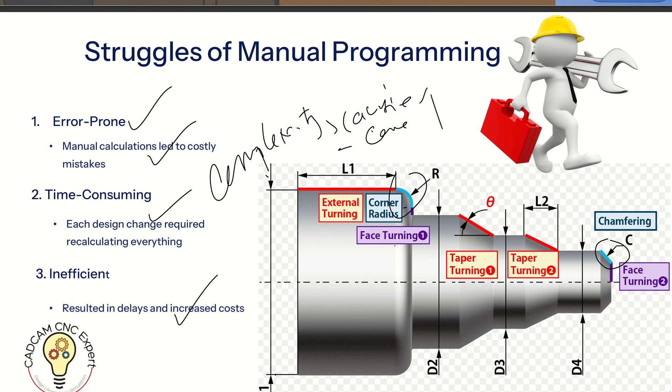There were also delays in terms of programming, since it was done manually. You're using a manuscript to write G codes down, then you transfer using a punch tape to the machine. So you look at these challenges, then you ask yourself, was it worth it? Now you are born in this era.

Maybe your generation was struggling with programming during those days, and now they have seen how technology has changed. And in today's era, how will they cope with technology? If you look at the past, and we look at how the transition has come into play, and we look at the present, you can ask many questions.

In the past, when you're programming, most of the workshops were heavy loaded. Machines were so huge. People would sit down at a table, calculating those parameters, putting it on the punch tape, then they set the workpiece so it can be cut. But technology came into play.

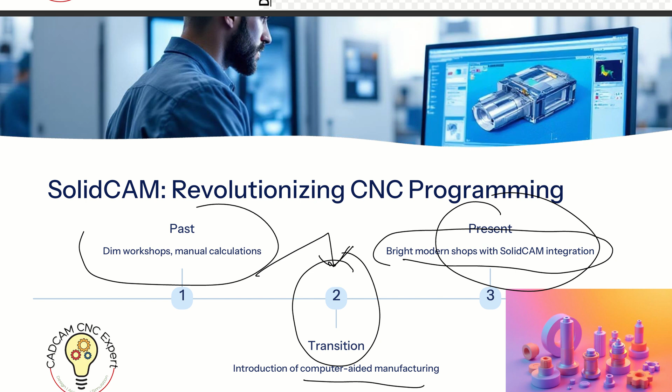Using computers, we have computer-aided manufacturing software, what you call CAM, that has come into play. And in the modern world now, in workshops, we have SolidCAM. We want to go to SolidCAM. We want to see how this SolidCAM will help us understand the time factor of programming parts for CNC turning.

We want to look at how SolidCAM works vis-a-vis the manual way of programming, because SolidCAM is now the current technology used in industries for industrial design and production purposes, to help you create 3D models and at the same time program, generate toolpaths, do a simulation, then generate G code.

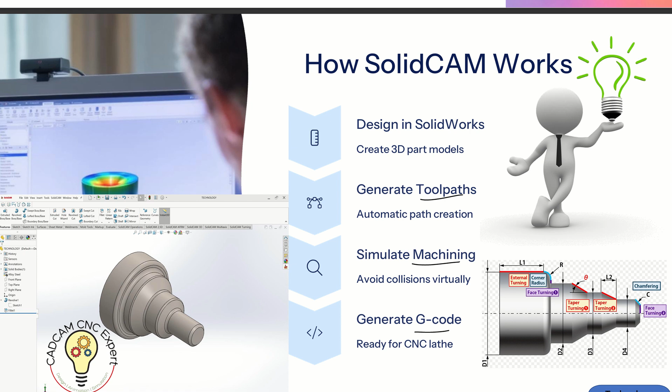So the main objective here is to compare the traditional way of programming and today's way of programming using technology. And we are going to look at SolidCAM. We want to design in SolidWorks. Then we create toolpaths. After creating toolpaths, we do a simulation. From the simulation, we generate a G code. Then we see how efficient it is, how time-saving it is.

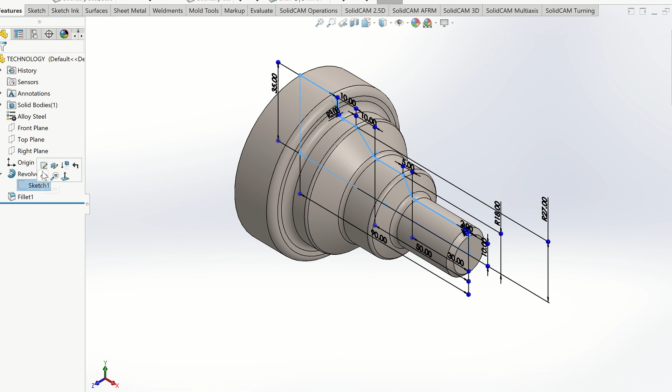I've already done my part. Maybe I'll show you the sketch. This is a simple sketch I want to machine. These are some of the parts. The diameter I was showing you is illustrated here. These are the radius ones. If you multiply by 2, you get the diameter, and these are the lengths.

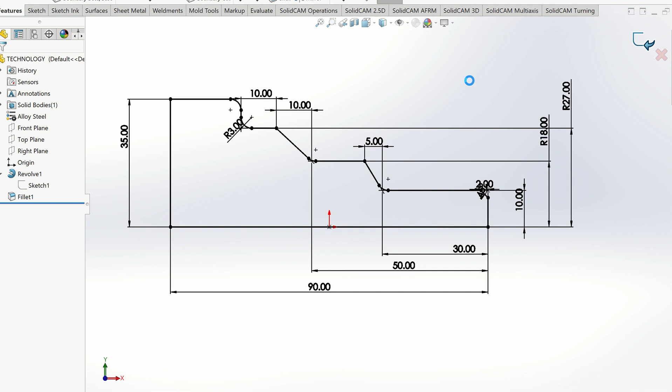I don't want to calculate, the software does it itself because I'm using technology. I don't want to calculate the radius or the chamfer or whatever. I want to use it the way it is because this software has done the simple work for me. So let's follow step by step how to create a part program using SolidCAM. My material is alloy steel and I have one part.

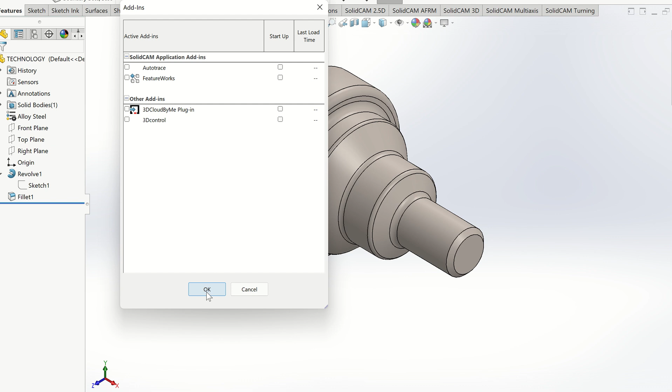I'm using SolidCAM 2021. You can use other versions, it will still work. So the first step is to ensure you have SolidCAM. If you're using SolidWorks with embedded SolidCAM or adding SolidCAM, you go to your options above here, then your add-ins, and you see all of the add-ins here. But I'm using the SolidCAM version that is integrated with CAD, which is an added advantage for me because it's only for computer-aided manufacturing.

So let's start one by one. You can go to SolidCAM here, and then create a new part, then turning. Then you click save. It opens up as simple as that. Then let's go hand in hand to see how this will work in SolidCAM, how SolidCAM eliminates the need for manual part programming. This is the simplest way SolidCAM works.

You start from SolidCAM operations, click new, turning, then click here. You can use external part saving or you can save the project as internal. Then you click OK. You select your machine here. I'm using Okuma. If yours is DMU, you can use DMU. Depending on your machine, pick the one that suits the type of controller or machine you have for programming.

I'm using Okuma. Then click on coordinate system. The first thing is to set up. In the old days they also did setup, but how do we set? You need to set the part origin where the tool will start cutting. You click on coordinate system, that is the part origin, where you use G54 to G59 on ISO part programming machines. Then click on center of the revolution face, pick any face, and it will put the coordinate system here.

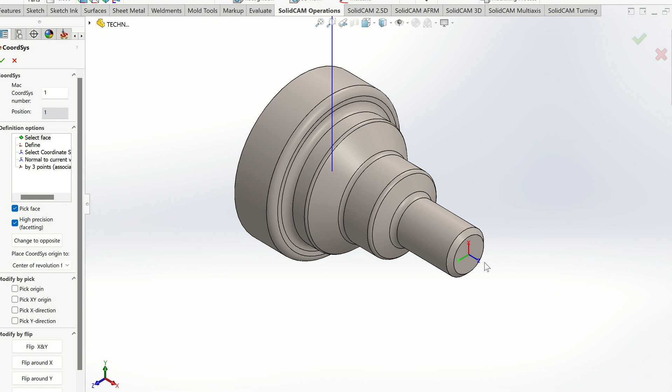The Z, which is blue, should be pointing away. Then the X should be pointing up or down depending on the tool approach and your tool orientation on your machine. Mine is moving up and down. So I'm along the X-axis for facing and along the Z-axis for turning, using face turning or cylindrical turning. Once you finish, just click OK here. Then next, just click OK.

We want to look at how this one works. Because I'm only using one part origin, I don't need to put another one. I can just click OK.

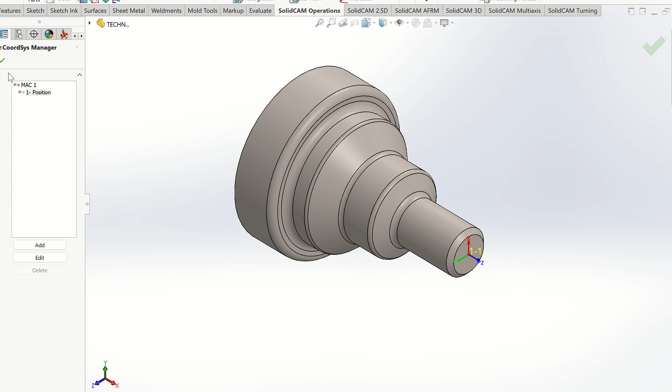You leave it to do what you call parsing. It scans the part, the model, and then it generates a profile or a rectangle profile along the Z-axis or along the Z path. Then the target, it has already picked the target. Maybe I can expand it more. The coordinate system is where the part origin is.

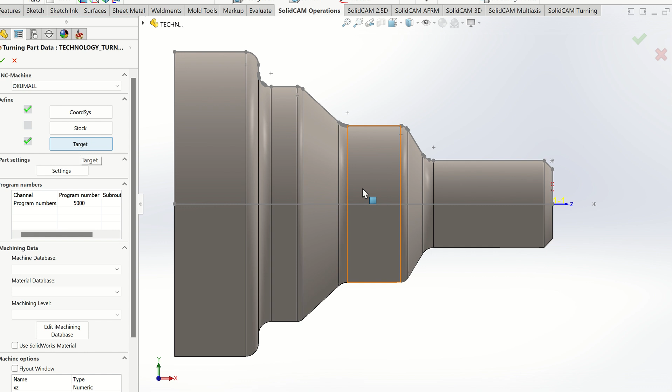The stock is the material that is not cut. Then the target is the material that is cut. So the material that is not cut should be more above this region. The target is this part. So the material which is not cut should be above this region here. So let's go to stock. We want to define our stock.

The simplest way to do this in SolidCAM: you can use absolute coordinates here. Then you can say take the stock dimension. It calculates the stock dimension, so you're able to know that here, that is the Z positive. I want to do facing, so I can put 2 mm for facing. You see now the stock, the green color is the stock material.

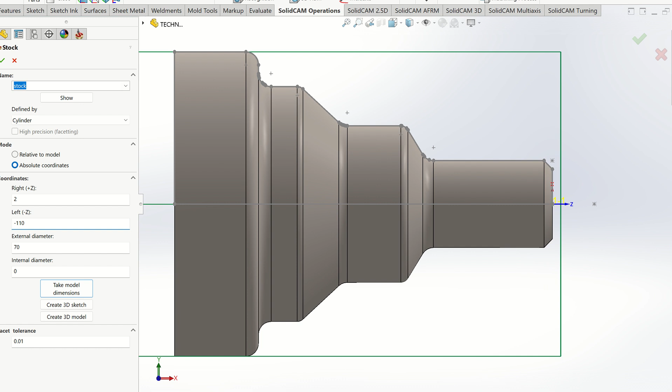It increases, the material which has not been cut. Then Z, for holding purposes, you can add 20; I have minus 110 or 100, it's still okay for this. If you're using a material which is hollow, you can put the internal diameter here, but mine, the stock will be solid, so I did not put internal dimensions here.

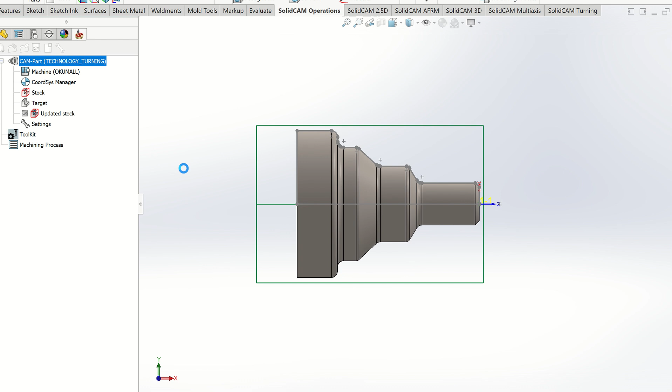Then the diameter here, because I cannot cut this part well unless the material for the external diameter is more. So if the workpiece is 70, then it should be maybe 75. You can have a 75 stock. Then I click OK. So this way I've created my stock. The green color has now changed to black. The black region is half of our stock, which is half of the material.

Then here, because I only have one part, the target is all selected, so I did not pick again. Click OK, then I proceed. The next step in SolidCAM is you need to create your holding place, the jaws. Where are you holding the jaws? So you come here to setup, right click on setup, then you say edit. We want to position our stock. Then under edit, click on this one, table clamping.

You see it generates this color. Is it purple? It generates a purple color. These are the jaws. Where are you going to hold it? I'm going to hold the other side, because the jaws are inside. I want to position it far away. Then I click on the tool positioning, then I click here, pick Z, then I pick a place somewhere here. Then I click OK. I can say now minus maybe 105.

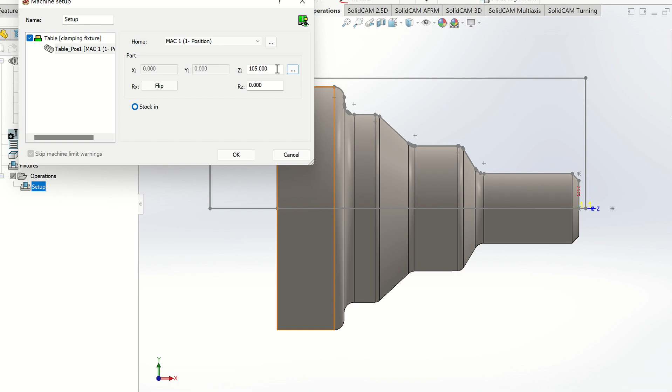Then I click OK. The value here will become positive, but on the other side, if you pick, it will become negative. So you can put a negative value here. Now you see my jaws have moved from this point to this point, so that when a tool is approaching, it will not crash into the jaws. It will be away from the jaws. You can put a negative value, or you can click anywhere, then you position it. Here it becomes negative, but here it becomes positive. That's okay. Then you click OK.

Next, now we want to add our operations. Take time, we'll see how fast we program with this, and then compare with the traditional way of programming. Come here to operations, right click, because we have done our setup: part origin, the stock dimensions, where our chuck will be. The key operations here are very simple: facing, straight turning, fillet, chamfer, combine. So this is combination turning.

We go to turning operations here, then click face. On facing, click new. The geometry is where you want to cut. Where do I want to cut? So you click on new geometry, and then you can pick this line. It should move down. If you look at it, it should move down, and then you click OK. This line, the one I've picked, this whole line, should move down.

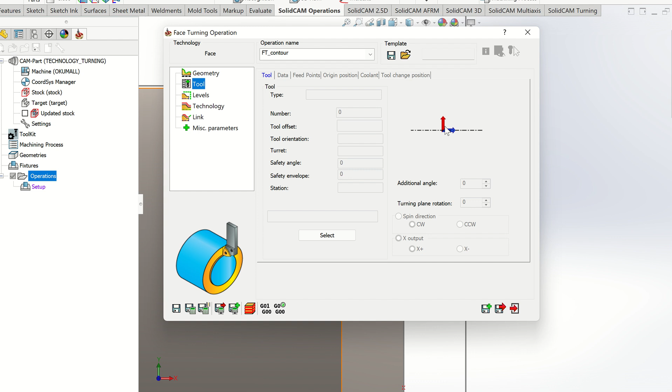So we go to tools, then click select. Here we want to add an external turning tool. Scroll down, come here, external turning tool, double click on it. It will open up, then you give the profile.

I'm using DNMG 1504. Use capital letters, DNMG 150408, and then press 0408. Then it updates itself here.

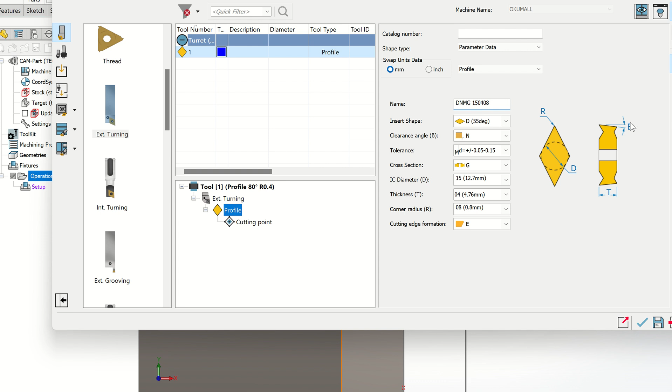So this is the tool I'm going to use, and then I click on this part to remove the positioning, so I allow it to position the tool here, so I can show it well and see the positioning of my tool. The tool has been well positioned.

Once I've done that, I go to cutting parameters. The holder is this here, cutting parameters. I can adjust my cutting parameters, 500. The finishing can say 600. This one can be 600 also.

You can use cutting parameters feed per minute or per revolution. This is G94, this is G95. This is G95, this is G94. If you use G94, you can put 100. If I use G95, you can use 0.1. So these are the cutting parameters.

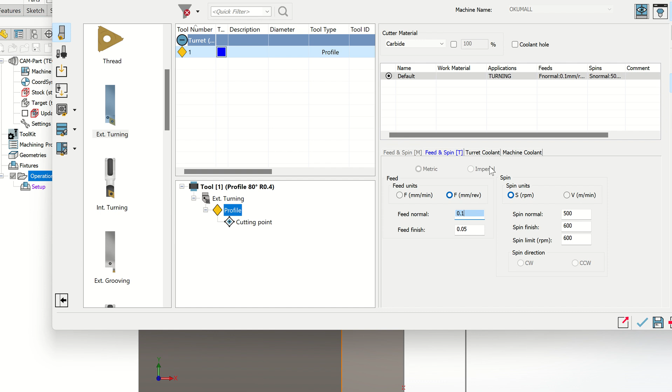When they were calculating, they need to put these parameters when they are cutting using manual programming. So once you do that, you can also change the holder, the cutting point. You can also pick the holder. You click on this tool to change the location.

You can click on this one to change the holder size. Maybe you're using a square straight tool. Here it is MD, so you put MD, MD, J. Then here the size was 15. Again, you put MD, J, and R, because my insert is DNMG.

So the holder will be MD, J, and R depending on what you have. Then the size is 20 by 20. I'm using 20 by 20 like this. Then the K, I'm using K15, so I can change here to K, meaning the length size of the holder. That is K.

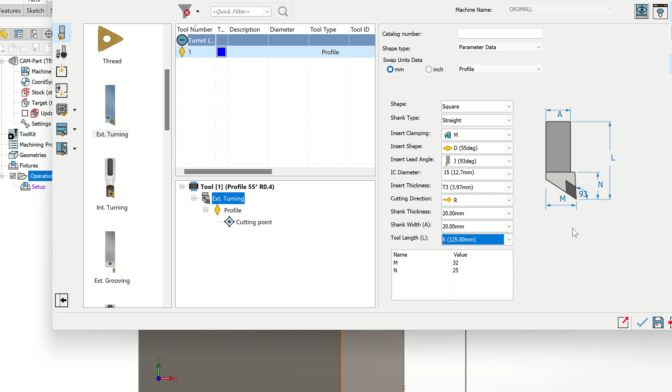Once I'm okay here, I click to accept the changes. Then I go to level, safety, I can put like 3 away. I go to technology. Here I can put equal, put stairs. Then you can choose to leave the material or not. Then go to links, click calculate.

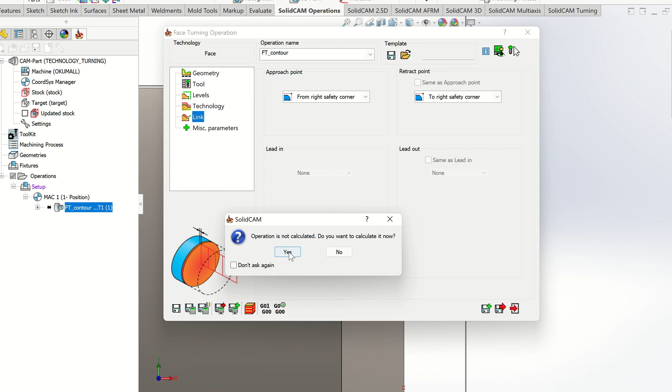Then let's go do a simulation. You click yes, do a simulation, yes. Then you click on turning. You can click on turning. Then you click simulate, so it shows us how it is cutting. That is what we call simulation.

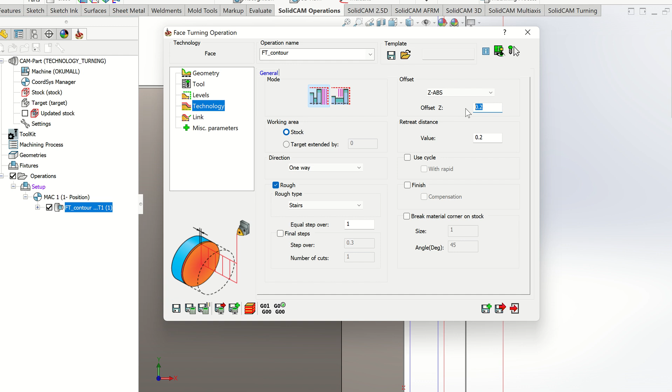So when you're using software, it's easy to cut. And remember, this material has left because I left those materials. How do you remove it? We can put here maybe 0, 0. Then we calculate again, then do another simulation, and see here how it cuts.

We can use turning, click on turning. Then you click here to play so that you can play. Then here it shows the cutting parameters when it's approaching. Now it has removed the material. You see it has removed.

This is what you call facing. You are now doing facing, just cutting on a flat surface, call it facing. Also in milling, you have what you call face milling, because you're cutting on a flat surface.

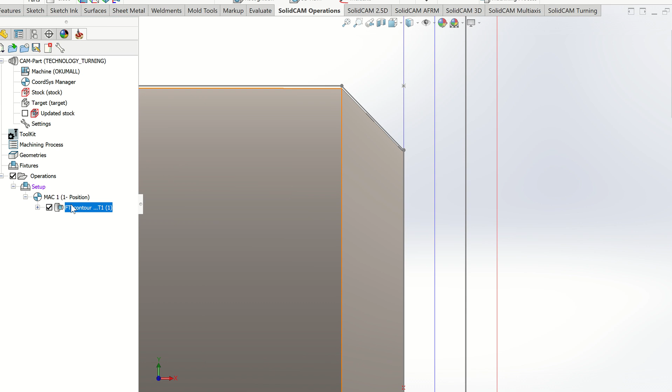So here you can also click exit after we finish, or right click here, and you have what you call — you can generate a G code, or use this SolidCAM simulation also. It has its own simulation, so you can do SolidCAM simulation. You click play, it will do the simulation, as simple as that.

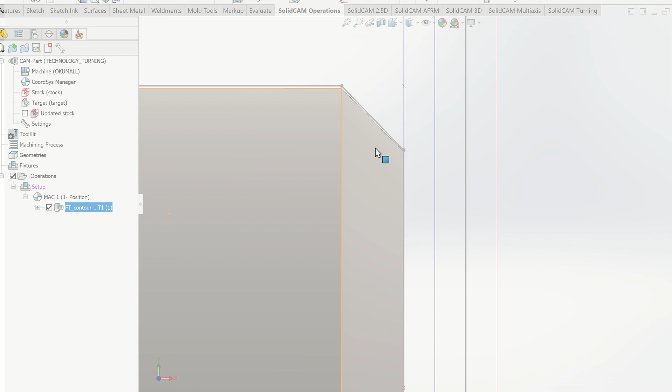So we want to go and add the last operation. Right click here, this one shows the toolpath. So these are the toolpaths now. How are they calculated? The software has done it, it has done computations — I'll show you why.

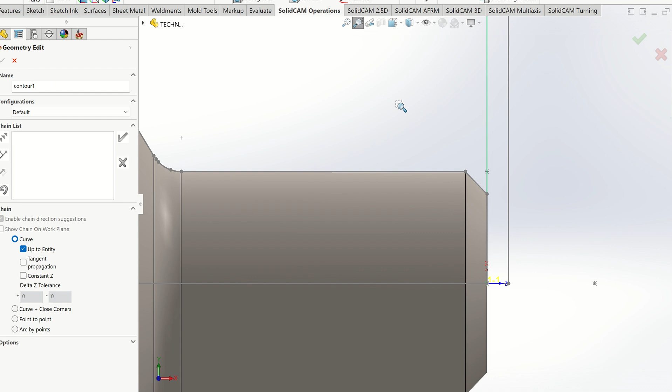Come here, operations, turning, then do turning. I want to use the same tool for rough turning and face turning. So click on this one, and then the profile, I can start from 0, zoom this region. Where am I starting from? I can start from maybe here, because that one I have finished. Then go pick the last one.

I can pick the last one here, like this. Let it calculate until the end, then once it finishes, click OK. Then tick here, yes, I'm using the same tool.

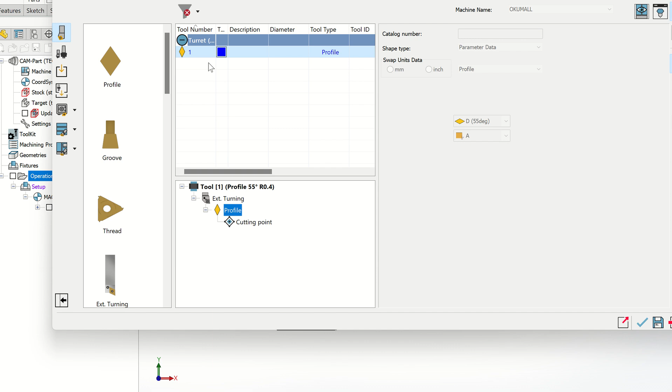Pick the same tool again. I'm using the same tool here, tool number 1, for doing turning and finishing. So I'll show you how to do semi-finish.

I want to use the same tool for finishing, so click here, ISO turning. Then ensure that you put here 0. Then click here compensate, to compensate.

So the tool will compensate itself automatically. I don't need to recalculate again, the tool will do it itself.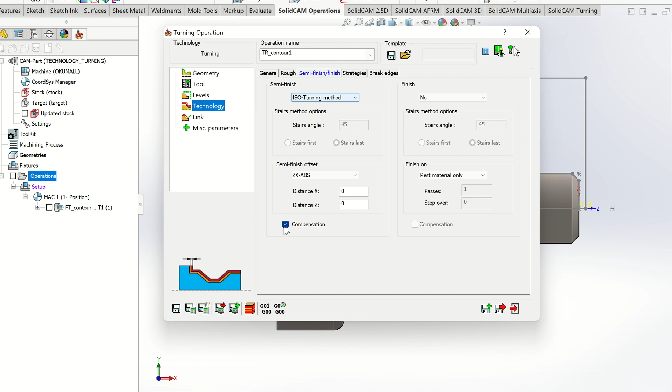Then strategy here, you can pick the descending motions or non-descending. I'm using descending motions. Break edges, you can leave the way it is. Then here you click calculate.

Once you finish, you see the tool paths have come here. These are what you call the tool paths. The blue one are the cutting one, the red one is the tool approach. The tool moves away when it's cutting.

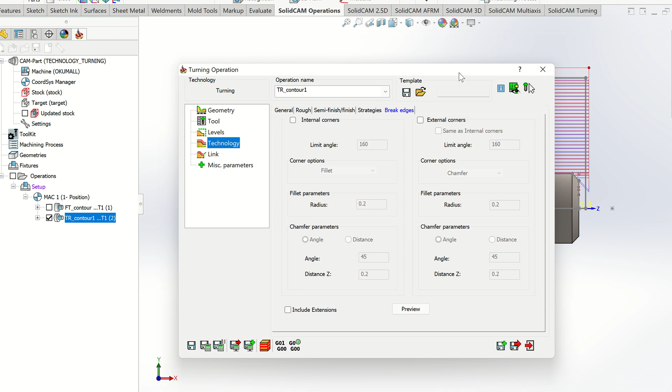Let me do a simulation, we see how it does. So click this one icon, do a click on, then say simulate.

Let's go to turning. You can minimize this, maybe if you want to see it well. You can minimize this one using your mouse, and position it at the center well, like this.

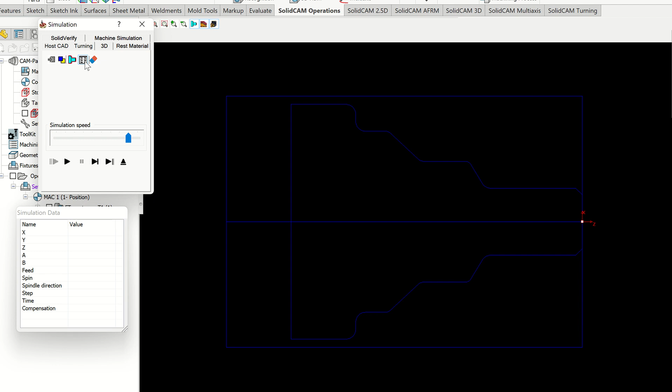Maybe to see it, you can increase the speed here. You can click on this to show the color, different colors, maybe this one the colors. Here the data when it's cutting, it shows you the data when it's cutting.

Then here you can say maybe show also the rest material. You can show the rest material, here it can display the colors. You can change the color that you want to display. Then here you can also stop on the next, in case.

So I want just now to click here, then show the data, then click here, we play, we do a simulation. Do you see here, the blue one here, it is my jaws, so the jaws are far away. So the tool will not knock in the material.

Then you see the blue lines, these are the cutting lines. They are now using what you call G01. I will generate the G code, I will show the G code, you see how it looks like. Then the red ones here are what you call the tool approach, the tool moves away from the workpiece.

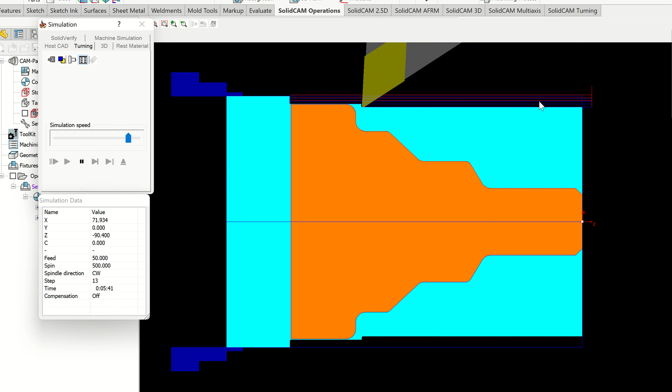This is the target, this is what I want to achieve. And then here, you see this color, it is leaving a material on the surface, which means it knows that material is compensated for finishing, left for finishing. So once it does rough turning, it will come again to do finishing on this material.

Yes, so let's finish this. We see how technology has changed or has shaped the industry of CNC programming.

It is almost finishing, almost finishing. I don't want to go fast, I just want to move the step so we achieve our target. Yes, we want to achieve our objective for this case.

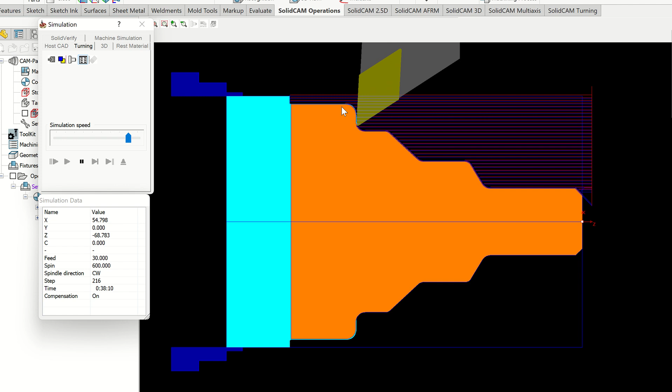And the work is perfect. It has finished, it has moved away. The red ones, as I said, is tool retraction. The blue ones here are the tool cutting or approach. So this is what you call the tool paths.

How were these people calculating tool paths during those old days? And how is software helping us to calculate tool paths in these generations? And how is it helping to automate the industry of CNC programming and CNC machining?

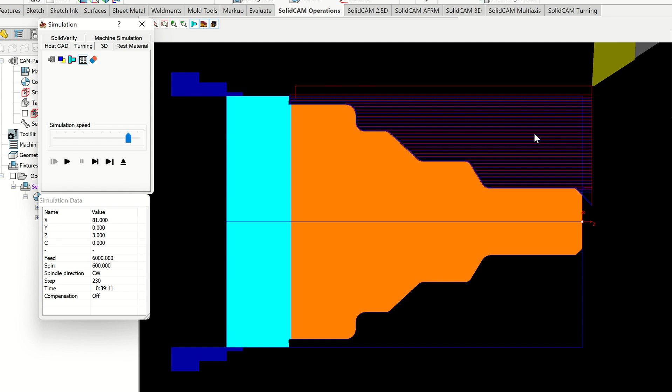Okay, we have finished, so let's go and generate a G code. We want to generate a G code. It is very fast, you click on this one. I want to combine, press control down, then select these two, then right click on it, then say G code generate.

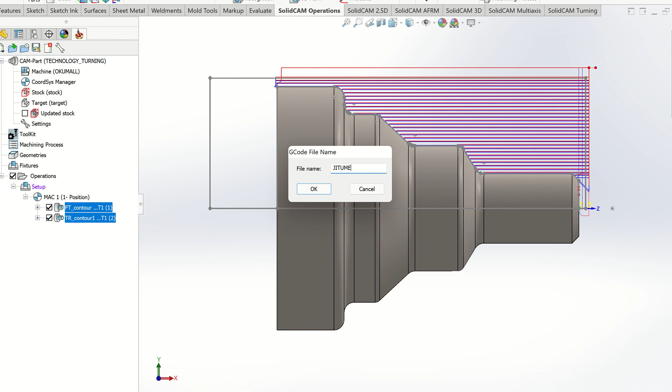Let's see the program, let's see the program, how it looks like. So this is what you call the G code. You see it has generated G code. Yes.

Let me zoom in a little bit.

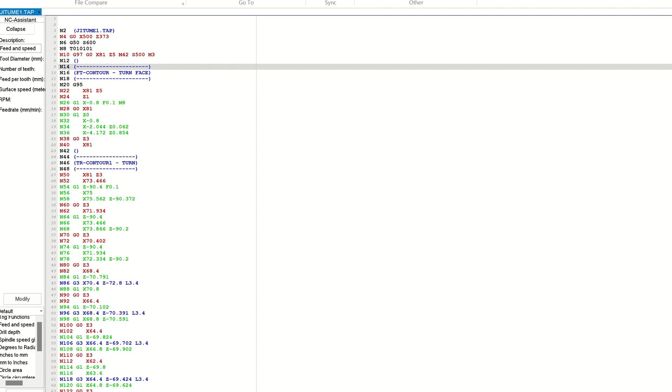This is what you call the G code. I wrote N2, so this is the name. When I'm editing, I can put a semicolon here, this one will jump. I can check my program.

This one I'm using the old system. I can use the old system and put, maybe my machine is just normally a Fanuc controller, so I can put 0101.

I don't want to put the activation of the gears, so I can leave this one. I can change this like this. This is how I want to see the time we are using to edit the program. Somehow the current one now depends on the controller.

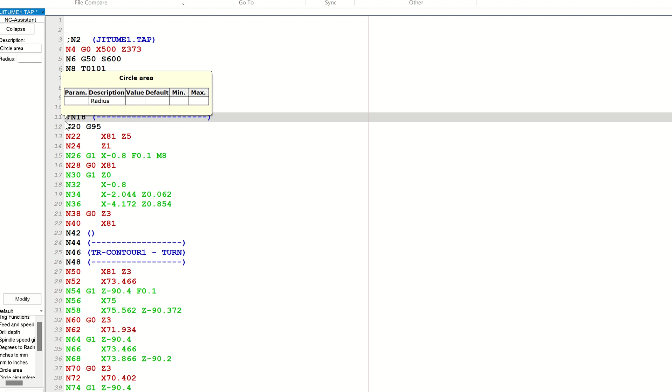If you're using Siemens, I will not edit the parameter because of the post process. But if I'm using other controllers, I need to check the current parameters before I take it to the machine. This one normally takes the least time, you don't need to take a lot of time editing this one.

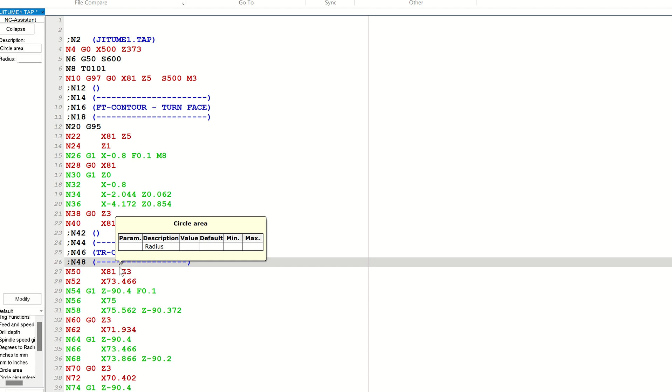Yes, so this is what you call the G code. I have programmed using SolidCAM, I have generated, I have done what you call simulation. I have generated the part, the G code itself. Then I'm able to check the program. So this is the program.

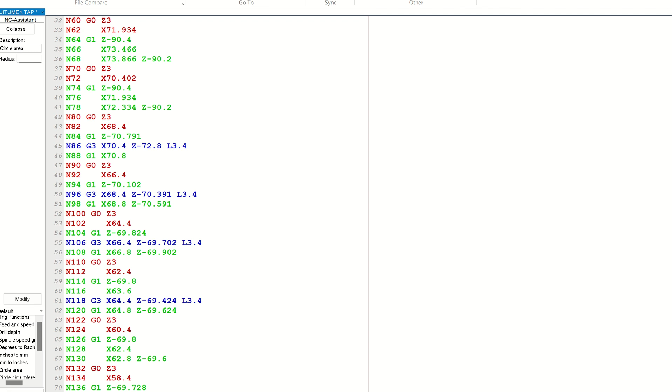The red lines are the approach. The green one and the blue one are the cutting. The green one is using G01 linear cutting. The blue one, which is G03, is using circular interpolation in the counterclockwise direction.

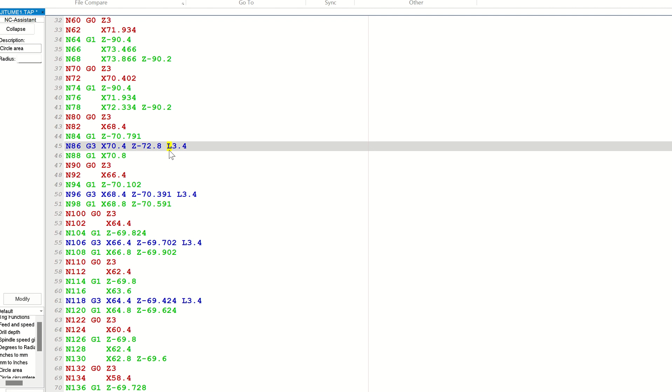This one I can also change. If I'm not using this, I'm able to change it very fast. I can come to edit this, say replace this, all of them. Replace, copy this, then say replace, then use R, then replace all, then say yes. This is very fast when you are editing it.

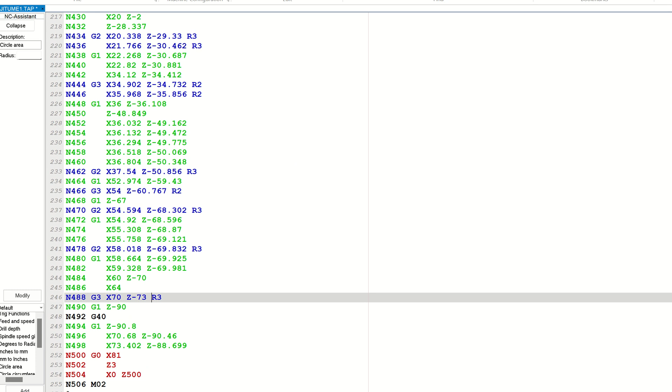I have replaced all of them so that when I put it on my machine, it will not stuck. I can also change this. In case I want, I can remove this or leave it the way it is. When I put a semicolon behind it, it will not cut.

Then here, if I put M30, the program will stop, will finish, then it runs back to the start. So this is what we call G and M code. G meaning preparatory function, and M meaning miscellaneous function.

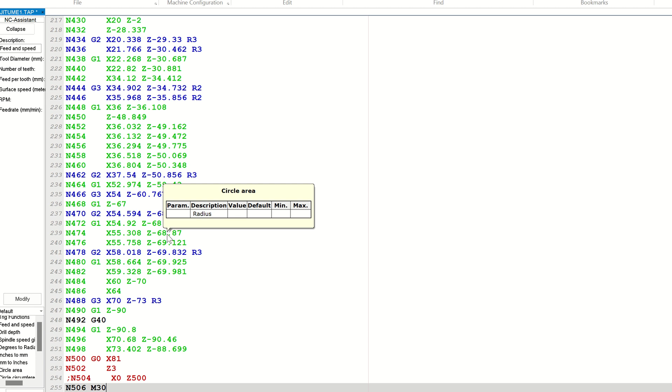So we have looked at how the software SolidCAM has changed or shaped the industry from the old manual way of programming to this current generation where we use SolidCAM to help us in programming. So welcome and be part of this exciting moment when we learn how we integrate our software to help us in programming.

So let's look at, if I might ask a simple question, what is the advantage of these softwares now? How do we compare the old ways of programming and the new ways of programming? Is there any advantage? Is there any step we may use? So this is key, this is key for our case.

So I want us to look at a simple advantage. Why SolidCAM? Why now SolidCAM? Is SolidCAM the technology we want? There are so many softwares we can use. I'm not marketing SolidCAM, this is just a question I was asking myself.

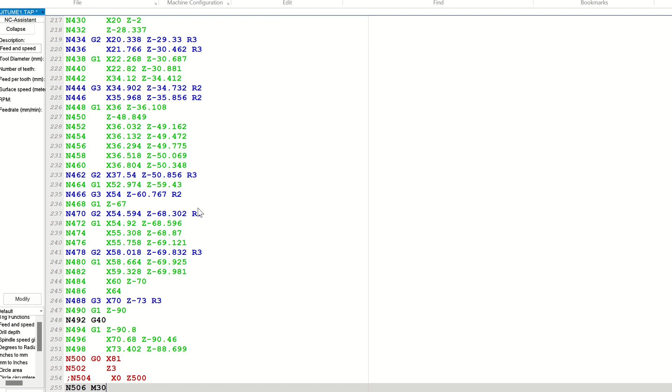How are these people programming, and how has it brought into reality the aspect of programming in this scenario, from the numerical way of programming until today? So if we go into our context, we want to understand how programming has shaped the world. So let's go and look at our programming.

Let's look at our programming. If we come to our presentations, what have we learned from SolidCAM?

One, when you compare manual programming, time was a factor, it was taking a lot of time. Second, it was prone to error. Then the work may take a lot of time. But we have used SolidCAM to do our programming.

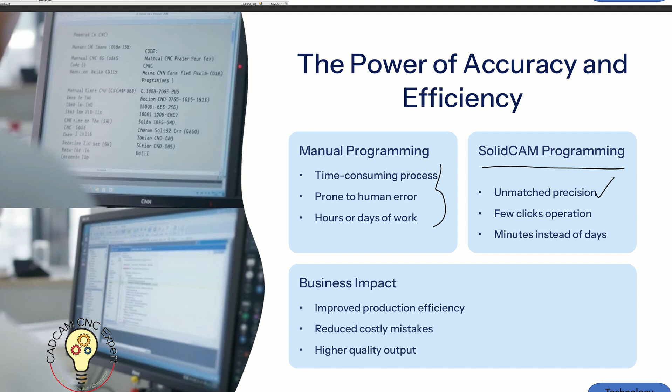One, the G code is fine because the software itself compensates the cutting parameters as I showed you. It is just a click operation, there are very few steps when you're using SolidCAM. Also, it has minimized the number of programming steps, because if you are programming a complex work it may take you days, but with this we have just taken minutes to program.

So in terms of business, we need to understand the advantage of technology, how it has evolved, and how it is improving production efficiency. So if you are in industry, you can opt to use CAM softwares to help you in programming. One of them is SolidCAM, we can also use MasterCAM.

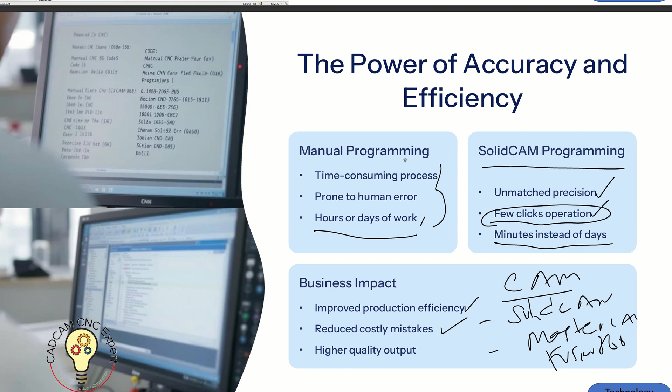You can also use Fusion 360. There are so many CAM softwares depending on what you're producing. If you're using CNC laser, CNC plasma, maybe CNC router, you need to check which software suits your work. It also reduces the mistakes that we make during manual programming, because when you make mistakes, it is at the expense of the company. At the end of the day, those errors have been minimized. The output is improved. The quality is improved.

In our real life scenarios, where do we apply this technology? In automotive, we are making gears, flanges, shafts. So we can use SolidCAM to program and automate our quality so that we can make complex shapes for our industry. Industry has changed. We now have high-tech vehicles. So if you have high-tech vehicles, you also need high-tech CAM softwares to help you in programming and in achieving quality.

Also in aerospace and aviation industries, you need to design high-tolerance components for aircraft. That's why we are using SolidCAM, MasterCAM, Fusion 360 to program and help in achieving high quality features for the aviation industry. Even in medical, making parts for implants and parts used in medical industries. So you need SolidCAM. This is the real world impact that it is achieving.

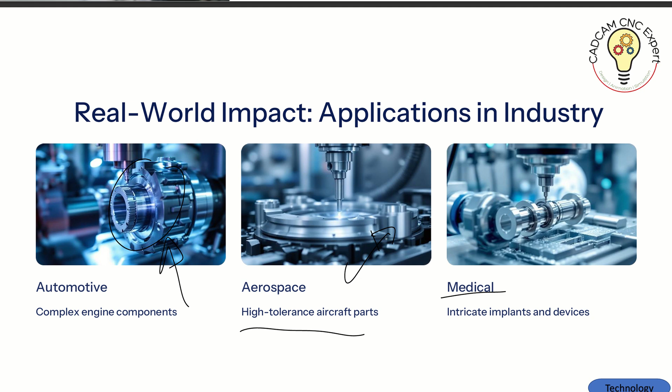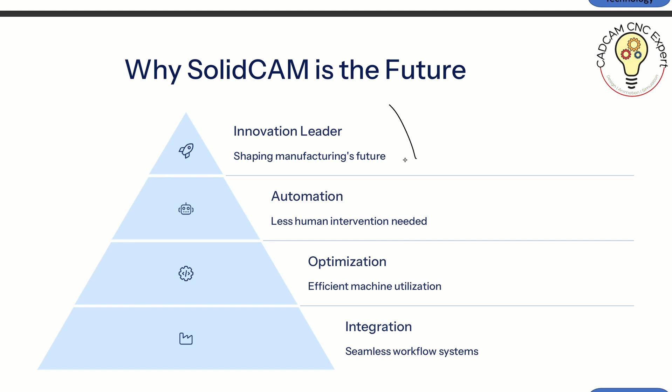When you look at World War I and World War II, there were challenges of quality, challenges of mismatch. Nowadays, mismatch has been reduced. Why SolidCAM? Is SolidCAM the future? I'm not marketing SolidCAM, but my topic is about how we learn from the evolution of manual programming to SolidCAM programming. SolidCAM is taking the industry. Why? Most mold makers and most industries are using SolidCAM to program.

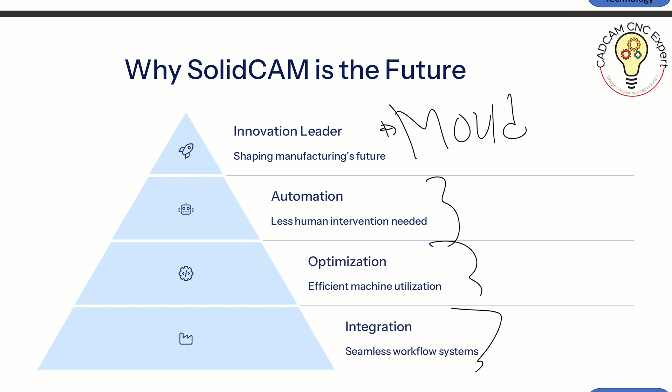It has also helped us to automate. You see what I've done? We have simply demonstrated designing, programming, and then automating our G code so that we can streamline our programming. It can also optimize machine utilization, very efficient. No errors; time, material, and cutting parameters are considered, so there's no loss once you have experience using it. It is also well integrated: you can integrate SolidCAM in SolidWorks to help you in programming, ensuring a seamless flow of work.

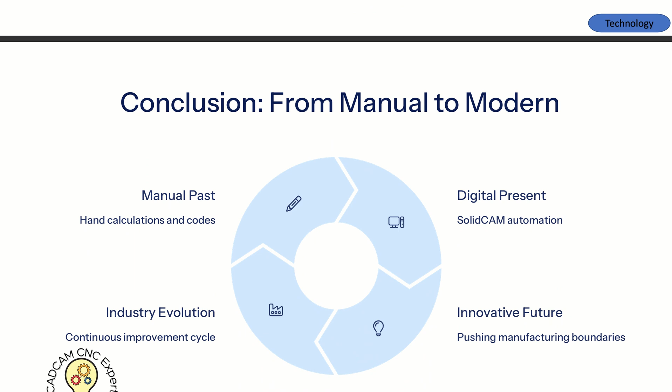My conclusion, to summarize: a journey from manual programming to modern technology. Yes, industry has changed. From hand calculations, calculating cutting parameters, writing down the G codes in a manuscript, and then using punch tape to write the program. Now we have the present technology, which is digital.

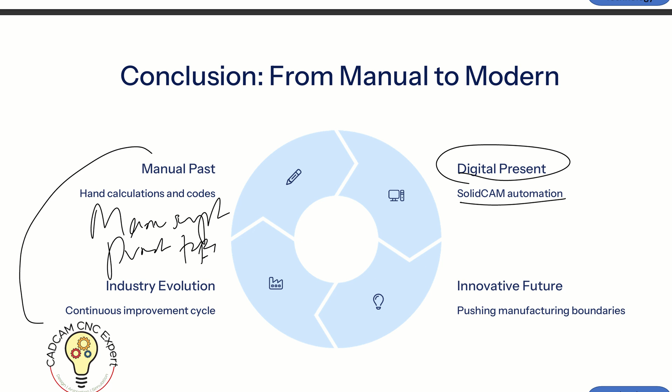The program I've generated, I can just put on a USB and put on the machine. I can send it using a LAN cable, a USB cable, or configure it directly to the machine. I just put the parameters on the machine, do the setup, and then it cuts. As simple as that. If you're using Siemens controllers, they are advanced. You can program directly on the machine without even using CAM softwares.

If you look at innovations now, things are changing. There are so many complex features coming into play, like making blow molds. With manual programming, you cannot program a cavity which is so complex and has different shapes. In traditional industries today, the shapes have changed. If the shape changes, so be it. The programming software helps you minimize errors when the complexity has changed.

So this is a call for you. You believe, you conceive the idea, you need to deliver. But for you to deliver, you need to inspire, develop yourself, be the influencer, be the empowerer, learn the skills, know how to solve problems, be creative, and understand how to use these skills to make things for the real world. At the end of it, you deliver skills, maybe change somebody's skill, because skill is life and skill is career. You can build somebody's career, employ yourself, and gain recognition. Once recognition comes, money comes in. So believe, conceive, and deliver.